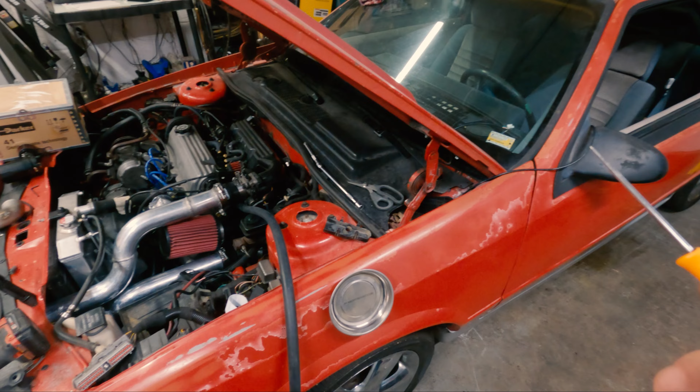Alright, for those who are wanting to use a wideband on their old turbo Dodges, specifically I'm using a SMEC based one. If you want to run a wideband signal to the ECU and log the output so you can tune it properly, what you'll need is a custom chip. What I'm using is a Moates Ostrich 2.0, so I can live tune this. But you can also just have a chip burned with the boost button, wideband to narrowband conversion turned on, and then you should be good to go.

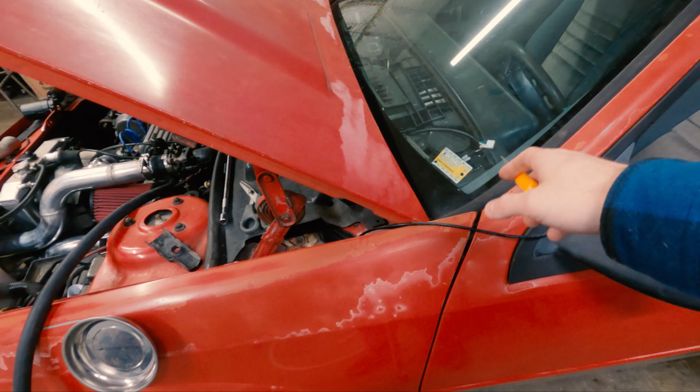You'll also need a wideband controller. In my case, I am using an AEM UEGO, I think is what they call these. These have an output on them that you can run into whatever source you want to log them with. So in this case, one of these wires, which I believe is the white one, we'll get to that in a moment, will be coming out and then being pinned into the ECU.

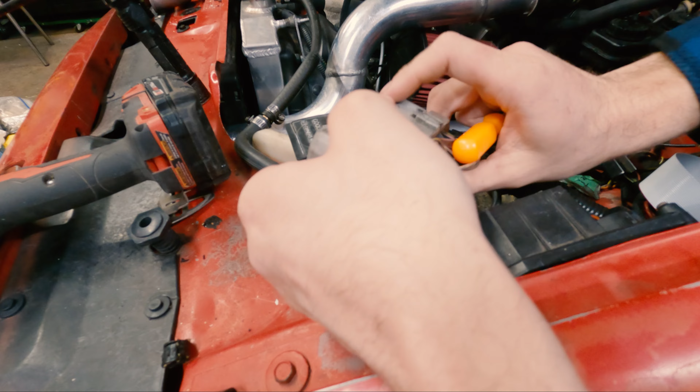And for the ECU, I'll put a pinout on the screen here, specifically for the SMEC, and that's what I'm using in this case. So here you'll see on the main connector, on this specific wiring harness, it's supposedly pin 23. You'll see these numbers up here. This is 41, 21, so we got 21, 22, and 23. So we'll just depin 23 by pulling out this red part and pulling out the pin.

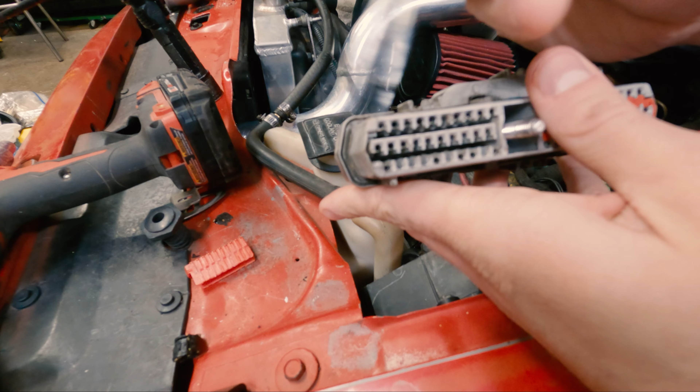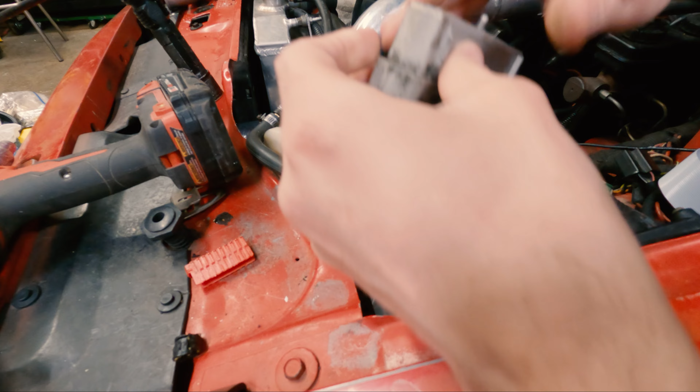Alright, so once you have the actual brace taken out, we're trying to disconnect pin 23, which is this one right here. So I should be able to just push this out, unless there's a lock in it. Let me look down there. Looks like there might be. There we go, got the lock out, so now I should be able to pull on it, and this is a pretty tight harness. See if I can get this in there without cutting it. There we go. And there's the pin.

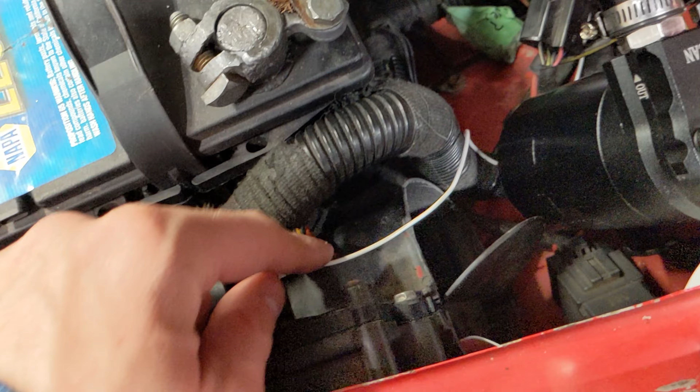So now what I do is make another one of these with the correct stuff on it. We're going to go from the wideband and pop that in there, and then we should have a narrowband signal going into the ECU itself. Alrighty, and here's it all wired in. So here I added a white wire going into the cab, which runs underneath the dash where it's spliced together. And then from there, it goes into the ECU, pinned into that pin, using these connectors.

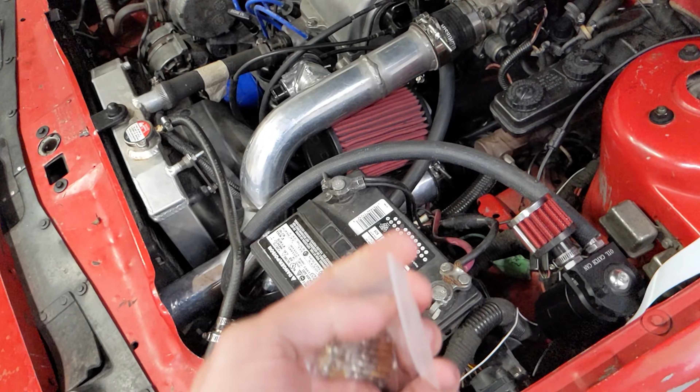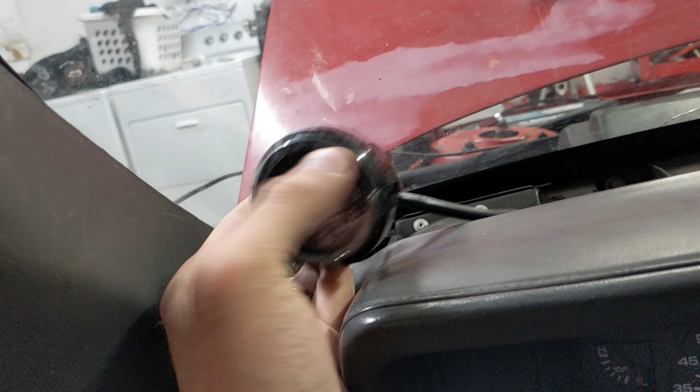I'll put the part number up on the screen here, and I got this from Jacob Kinet from Kinetic Creations. He makes wiring harnesses and other goodies for Neons and SRT4s and PT Cruisers. But because a lot of the stuff from this generation till PT Cruisers and SRTs is kind of the same, he actually sells the pins for these, because I think those are the same pins they used up until like 1996. So normal first gen Neons use this. A pack of these was about 50 cents a piece plus shipping, so reasonably priced, and I got extras just in case.

So call that good. And the point of this is to change the value of your narrowband, or what you want your narrowband to look like, because no matter what, your car in the end will still be running on a narrowband, but it will be using the wideband as the input through conversions through here, and I'll explain that in a moment.

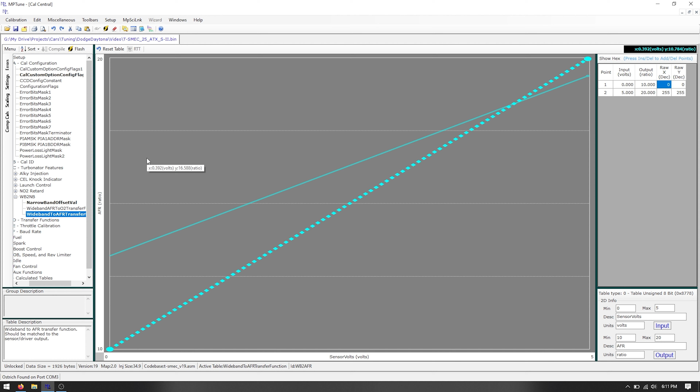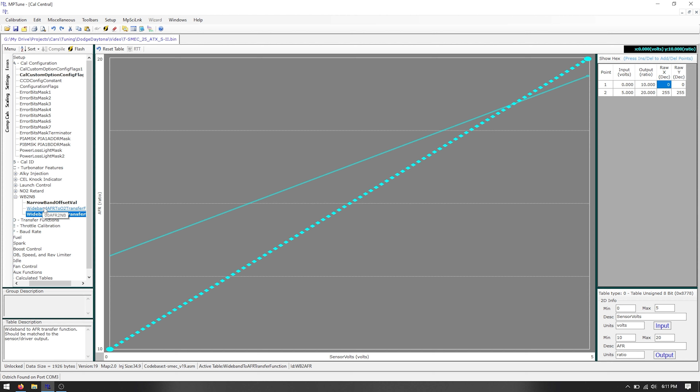So what's happening here is once you enable this feature, the routine that checks the O2 sensor now checks these outputs first. It takes the 0 to 5 volt and converts it into the AFR signal. So if we're getting right about here, 2.5 volts, you'll see on the y-axis that is 15 AFR. So whatever voltage the computer sees, it'll move it along these two axes and give an output of your actual AFR.

It'll take that number and feed it into this wideband AFR to O2 transfer, and you'll see these numbers right here, 14, 15, 19, and 4. Those are your actual AFR. So whatever number comes in here, it'll plot it on this route here. If it's plotted on this plateau right here, this would be rich, if we plot it on this plateau right here, this is somewhere in stoich, and if it plots it over here, it is lean. So what we're going to do is scale this as well.

So down here, see for our air-fuel ratio, it says minimum of 4. Well, since my gauge only reads 10 to 20, I'm going to change my minimum to 10. I'm going to change my max to 20.

Alright, now that kind of messes up the scaling here. This stoich point, now it thinks stoich is 16.7. So we need to move this over to the left, so I just selected it, and I'm going to use the left arrow key, and I'm going to watch up here on this input ratio. I want to get to about 14.6 if I can, so that's slightly rich. So 14.6, I'm going to call that good.

And then we'll go to this other one here, and we'll move that to about 14.8. So about right there. We'll call that good. And if you look online to see how an O2 sensor reads, like an actual narrowband, you'll see it pretty much looks exactly like this. It goes, over here you're rich, you're stoich, and you're lean. That's all it knows. So it just sits there and bounces back and forth, trying to stay on this up and down point right here.

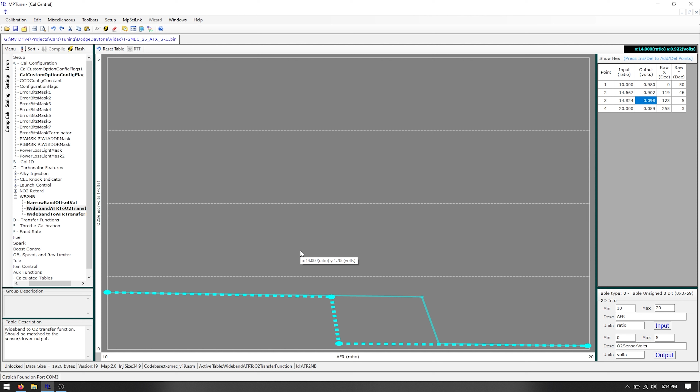Alright, so this looks all good. So that's all scaled correctly. And like I said, this narrowband transfer, once it gets out of this spot, this is what's actually sent to the computer. This is where you'll see this voltage output right here, 0.9, 0.9, whatever. So this is what's actually feeding into the computer and determining what the computer should be running on. And you'll see down here it says 0.0 and 0.09 and 0.9 and 0.8. So basically it's bouncing between rich, lean, rich, lean real quick.

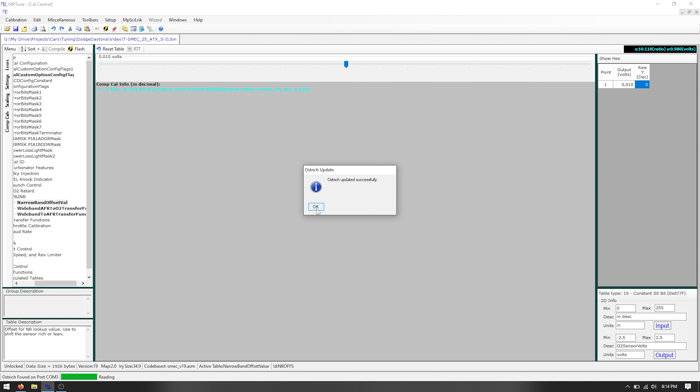And if for some reason, and I'm not really sure why you'd want to do that, you want to change this voltage that's coming out, like these ones right here, you can use this offset value to mess with it. But ideally you shouldn't have to do that. But now that this is all set and scaled, we'll go ahead and flash. It's reading right down here. Flash it. Alright, cool.

So now from here, we're going to do the most important part, which I think is the biggest feature of doing this: we're going to set up MPScan to actually read this AFR ratio so you can actually tell and log what the car actually sees. So I'm going to pull up MPScan real quick. Okay, so here I have MPScan open and I just have some blank templates right now. I don't have any gauges set up. If you already have gauges set up, you're going to want to delete your AFR ones because they're not going to be scaled correctly.

So first thing we're going to do is go into the template. We're going to go to display layout, and I'm just going to pull up one I made for this video, video layout. Okay, so here's my gauge. Now that we have AFR defined in the tune, we need to define it and scale it the same way in MPScan. So we're going to go to settings, layout files, then gauge settings. And right here we have AFR O2 value, which is AFR command.

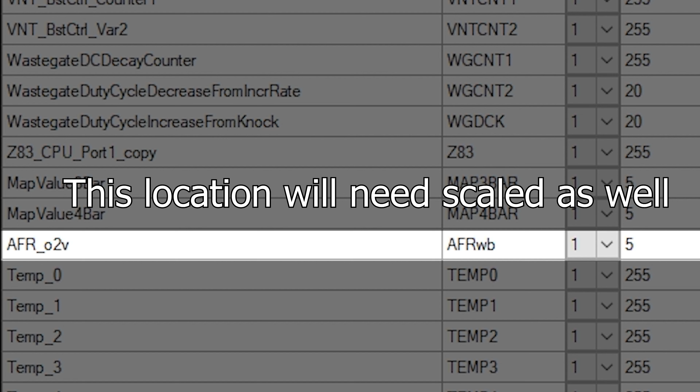And we'll go over here to the left and say display minimum 10, display max 18, which is probably fine because if you're reading over 18, you shouldn't be driving your car anyway. And then ECU minimum 10, so that's correct. Yours might say 4 or 5 or something like that, but on the ECU minimum and maximum, you want to put it to what your gauge is. My AEM is 10 to 20, so this is 10 to 20. And then we'll go down and check the other O2 values. I believe there's one at the bottom here.

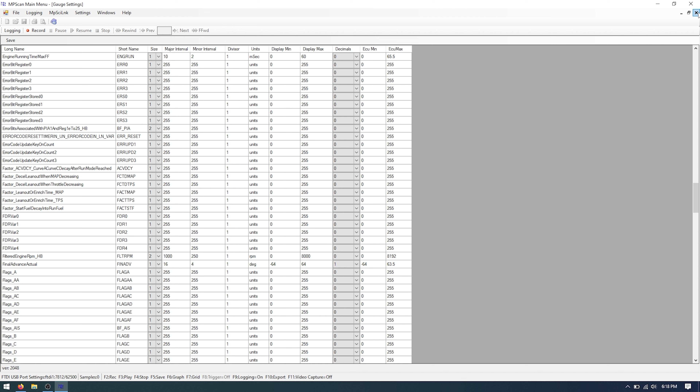Okay, so here it is. We got O2 sensor value and O2 sensor volts. The O2 sensor volts is the actual voltage coming from your gauge going into the computer. Mine is 0 to 5, so if yours is different, change it to your correct value here. And I've also scaled the O2 sensor value to the same thing, which I don't think really matters as much because that's technically a 0 to 1 volt value. That's what the actual computer sees.

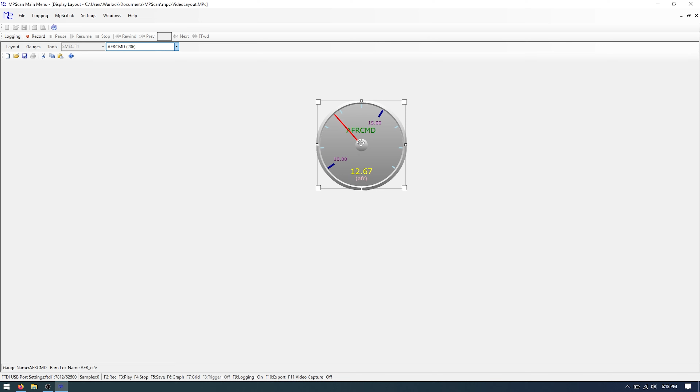So now that we got those scaled, we can go ahead and hit save. Saved it. Okay, close this. And now we're going to want to make our new gauge. So first we're going to go to AFR command. This will be the gauge to see what the computer's wanting at the moment. So we'll set that off to the side. Make another gauge.

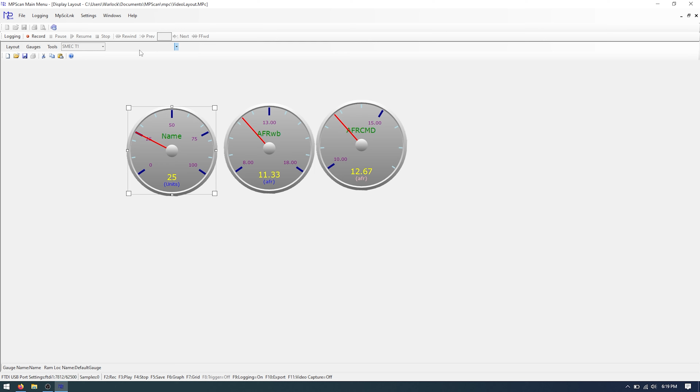And we're going to do AFR wideband. So this will be the input, or what your actual wideband should be seeing. And if this is scaled correctly, it should read from your 10 to 20. So my gauge, I have the minimum set to 8 and the maximum of 18 because if it's down to 10, it should be popped right around the side here.

And then we'll add another gauge, and we'll go to O2 voltage. Okay, then we'll add one more gauge. This one will be O2 value.

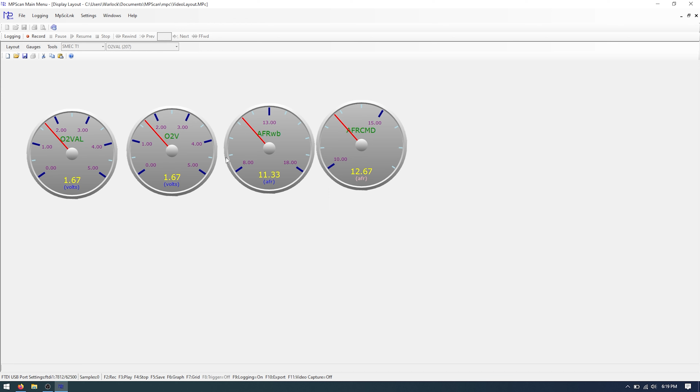And again, to explain what these all are, AFR command is what the computer is commanding at the moment. AFR wideband is what the car is currently reading. Ideally, these should be the same, if your tune is correct. The O2 voltage is the direct raw input from your gauge into your computer.

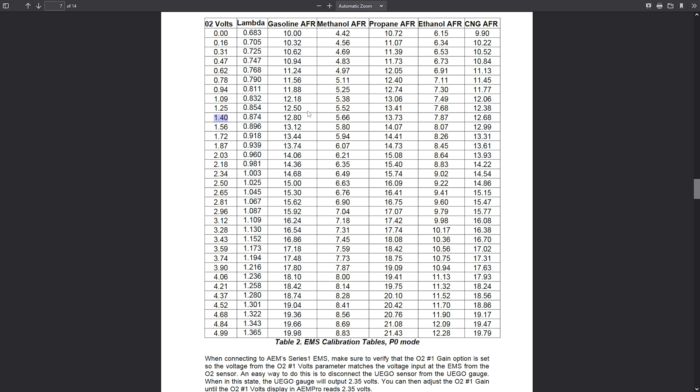Now, using this scale, you should be able to double check to make sure that your AFR is matching your O2 voltage. So if that gauge says 1.4 volts, you should be about 12.8 AFR, and ideally you should be on this gauge right here getting 12.8 AFR. So I just use this to double check.

And the O2 value is what, through all those maths and tables, is feeding into the fueling table. So this O2 value should be pretty similar. You'll probably see it bounce between lean and rich back and forth, but that's just to see if it's scaled correctly. If you mess with that O2 offset, you'll see this kind of look a little weird.

All right. So now that we've got those all set, go ahead and save our layout here. I'm going to close that. I'm going to close my profile, reload my profile. There's my gauges. All right. And now it's time to see if it all works. So I'm going to hit here, key on, hit record.

All right, so there's the values here. And I'm looking at my wideband. That's pretty close to it, slightly off, but you can sit there and kind of readjust everything. So I'm going to turn the car on now. Okay, looking at the gauge there, the AFR wideband is pretty correct. And the AFR command, let's see why it's having a problem.

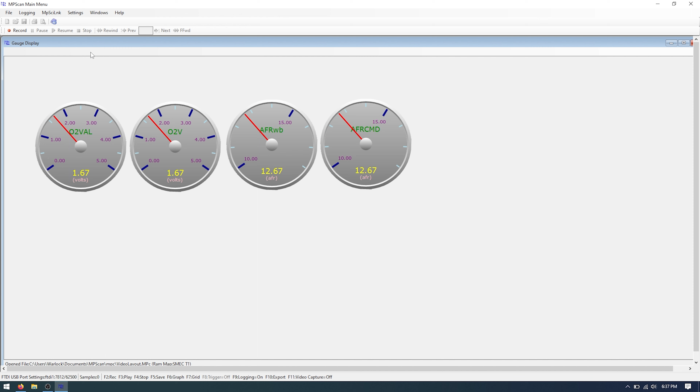Alrighty, so I got it working now. So what I had to do was delete the gauge, go back into the tune, double check that, make sure that everything I set was there. And when I saved it, I guess I didn't save one of the tables, so I resaved it, reflashed it. Now we're good to go.

So I'm going to put the key in the on position. I'm going to hit record. And as you should see, when I turn the car on, the AFR command and AFR wideband should be almost identical. The O2 value and O2 voltage should be about the same. So I'm going to go ahead and turn it on. Well, there you go. Now they're reading the same.

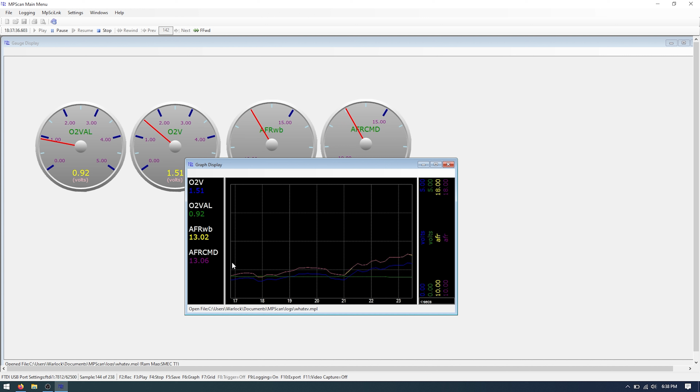So now you should be able to log all this. So if I hit stop here, there we go. So using this, you should be able to now log and be able to use a correction factor. You can actually use this AFR wideband to now feed back into the computer using one of the tools built into MPTune to actually correct the actual AFR versus requested, so you can get them closer together. But I think we're all set here.